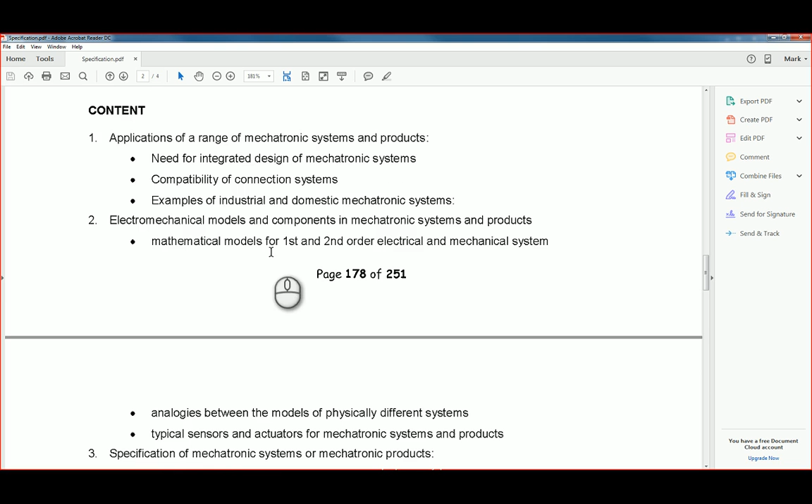The specification, you should have access to this already, you should be able to see. As you can see from the outcome content here, 1 and 2 is what's going to be covered in the exam, 3 and 4 down here is what was covered within the coursework. So we're looking to look at the application range of mechatronic systems and electromechanical models and components of mechatronic systems and products to do with first and second order systems, analogies, and sensor and actuator technologies within mechatronic systems.

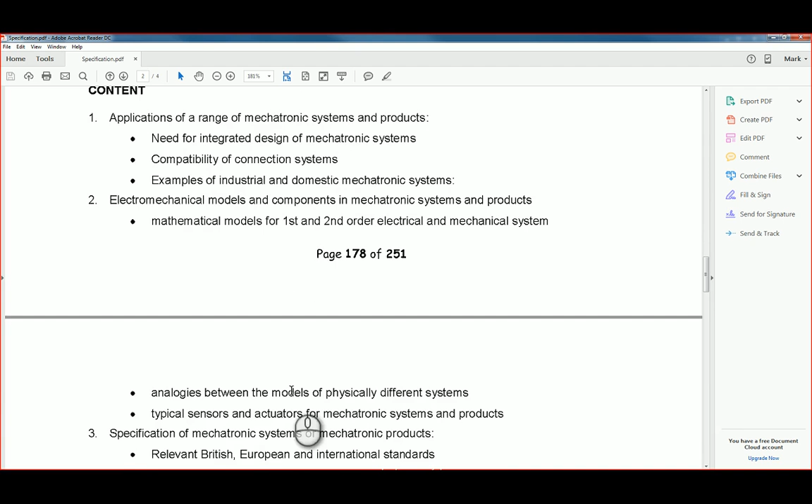In case you weren't aware, the exam is worth 50% of your overall grade. It's a 2-hour written exam. There's 10 questions in this particular one, covering the range of the outcome content of 1 to 2.

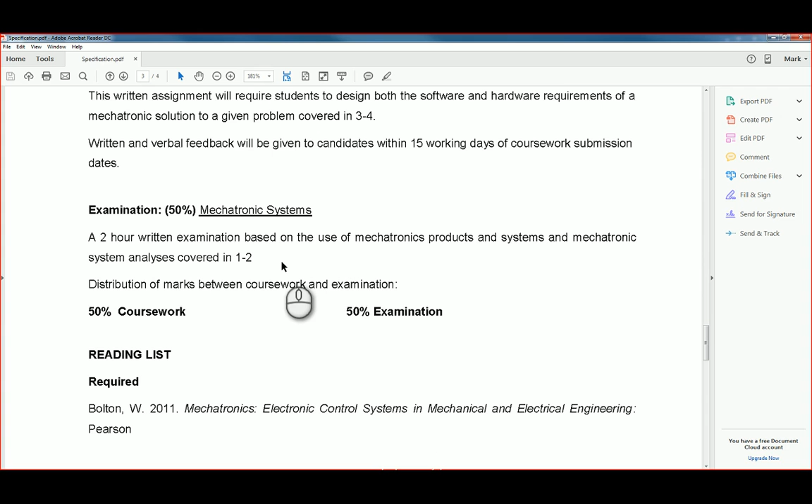So as I was saying earlier on in the class, your exam is mainly going to be based around the first 3 folders, and the rest was used for coursework. Within the folders, more information is really required for both coursework and exam. So don't be put off by the sheer amount, especially some extra PDFs which are chaptered out of certain textbooks, which I find useful for creating some of the notes and good for background reading if you have extra time on your hands.

So I did go over last time about reliability, unreliability, availability and unavailability. The notes were based out of the Reliability Prediction Basics PDF, along with one of the textbooks within mechatronics and also a textbook within measurement systems, and also a good PDF there is the probabilistic R&M parameters PDF.

But the one we're going to look at now for a few seconds is Reliability Prediction Basics. So make sure that when you're looking at this particular one that you're familiar with the main terms, what availability, unavailability is, reliability and unreliability, be able to define them, be able to quote the formula.

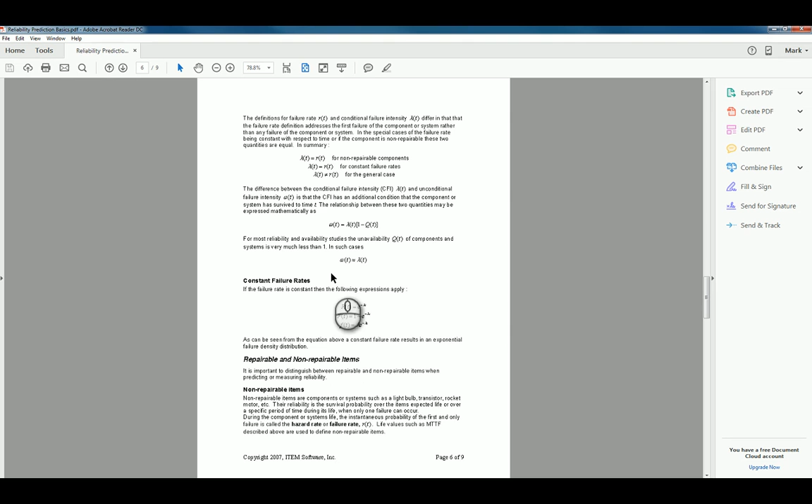There's also another one there, this is only 9 pages and quite concisely wraps up some of the formula, where they're derived from, how to rearrange in some instances which might be required. Talks about the bathtub curve, which we talked about last time as well. Also talks about redundancy, different methods of putting it in place, the reasons behind it, etc.

One of the main texts, however, will be, if I go back to this window, number 11, the reliability of measurement systems. So that is from the textbook I was speaking about a few seconds ago. It's a chapter out of it on reliability, choice and economics of measurement systems.

It runs through some of the main aspects again of how you derived some of the formulas, and again you're not going to need to know how the formulas came about. Some of the stuff in the actual text is a little over detailed for what we require within the exam and within the unit generally, but you do need to know where they came from, just for your own knowledge, so you know why they're being used, and the formulas themselves.

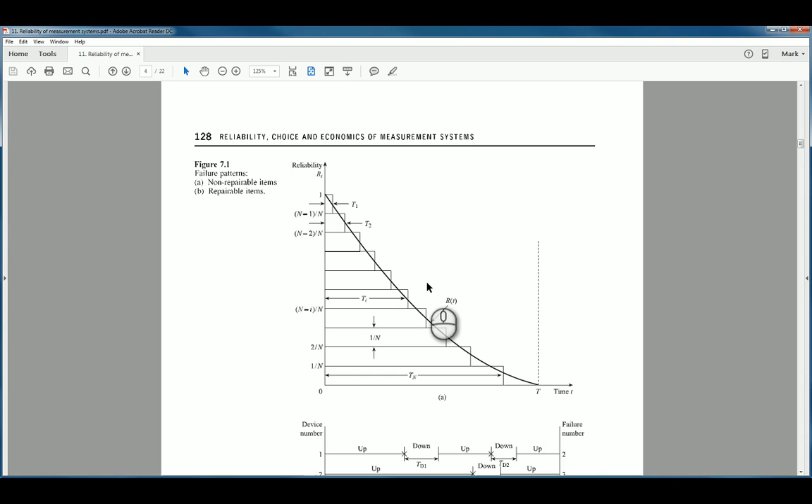I'm not necessarily saying you need to know each and every single one of the formulas on this particular one, but being able to show where they came from, just from an understanding point of view, to help you in some of the questions.

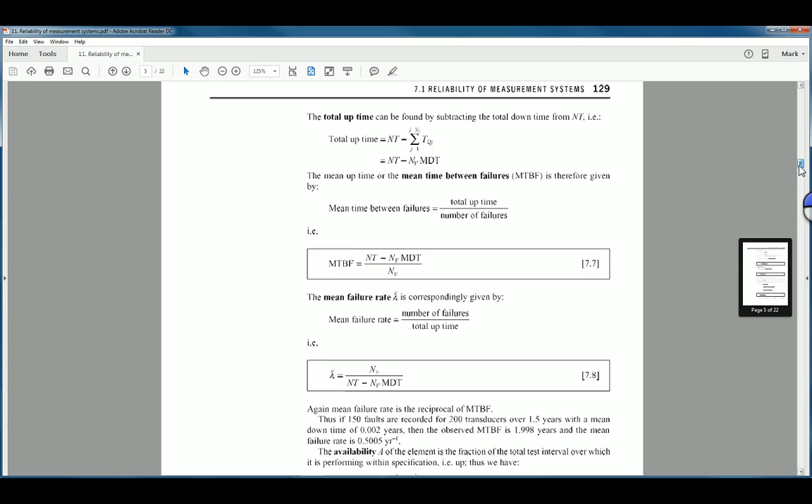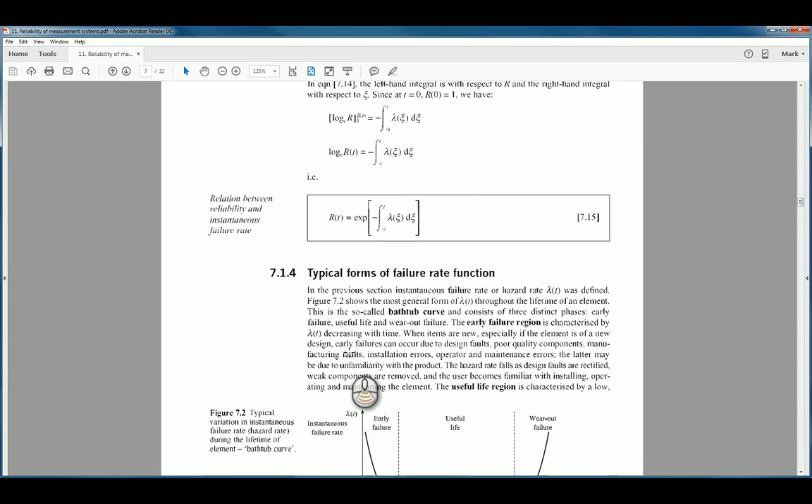So as you can see, as you scroll down through, you can get all the different types, failure rates, and so on. Just being able to understand each of them. Now there's some of them there that you see the derivation of has come from either integration or differentiation to derive an answer. You're not going to be asked within the exam to do that.

The maths within the exam is basic enough level maths. You need to obviously be able to understand the terms that you're working with and be able to be comfortable with rearranging some formulas and applying formulas to set values to derive other values to then get a final answer from a different calculation. But it's nothing that is a stretch beyond level 4 mathematics at all.

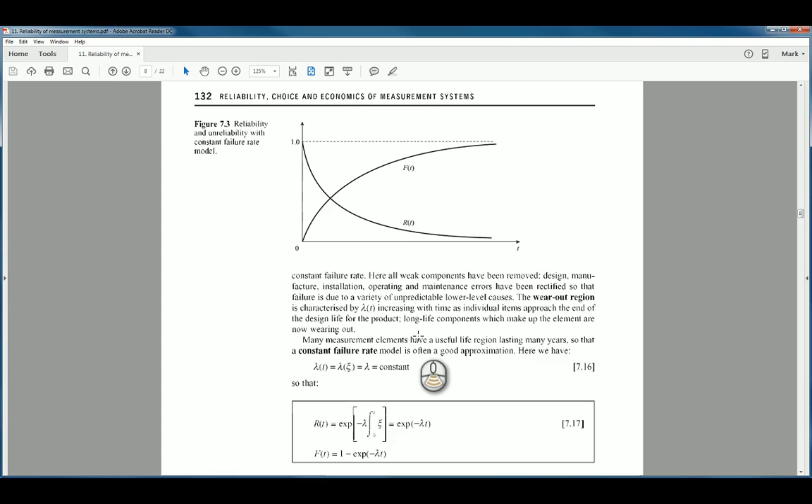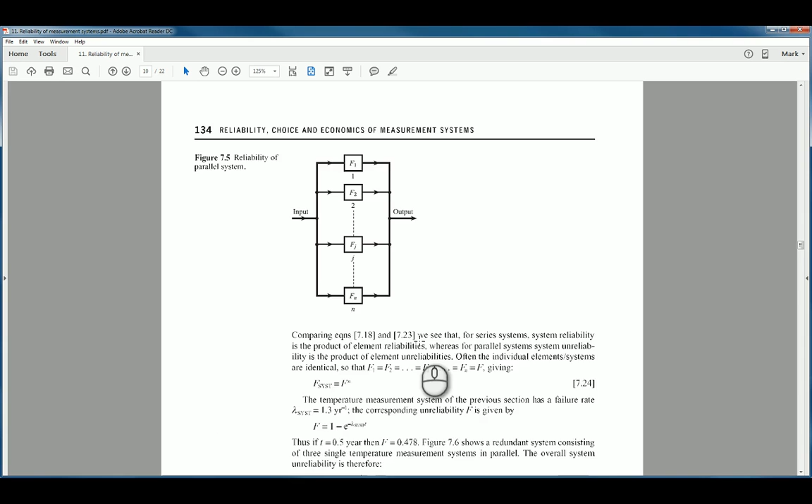Don't worry too much that some of the derivations of the formula within here seem overly complicated. The ones within the exam are nowhere near what you're seeing in here. All you're doing is applying the final formula that is provided within this document to a question to gain an answer.

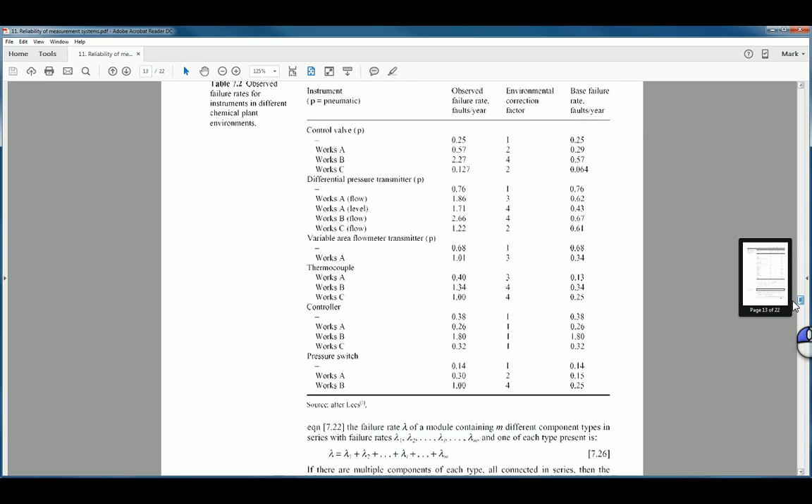This particular document is where a lot of the notes were made from, but it goes far well and beyond what we actually need. It is good for down near the end here that it does have design and maintenance for reliability. Being able to know why some of these terms are used and what they're basically used for within the measurement system would be useful for your exam.

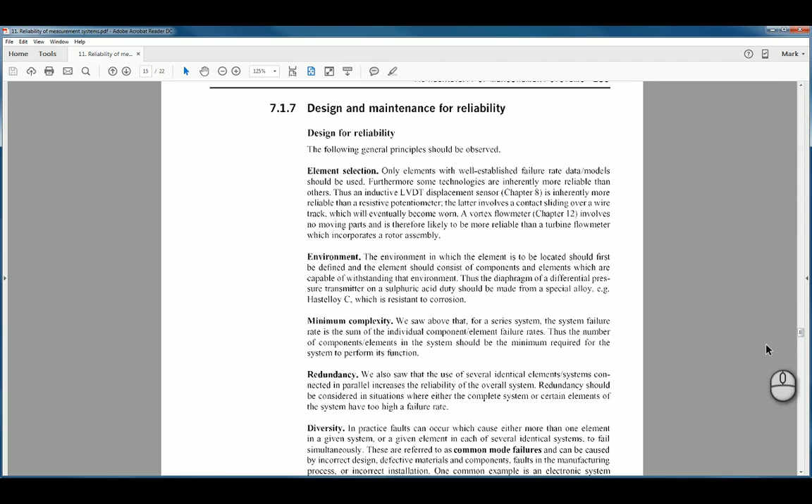The choice of measurement system isn't really applicable to us, so just skim anything else in this document. There's nothing really, honestly, within that particular one that is useful to us for the exam.

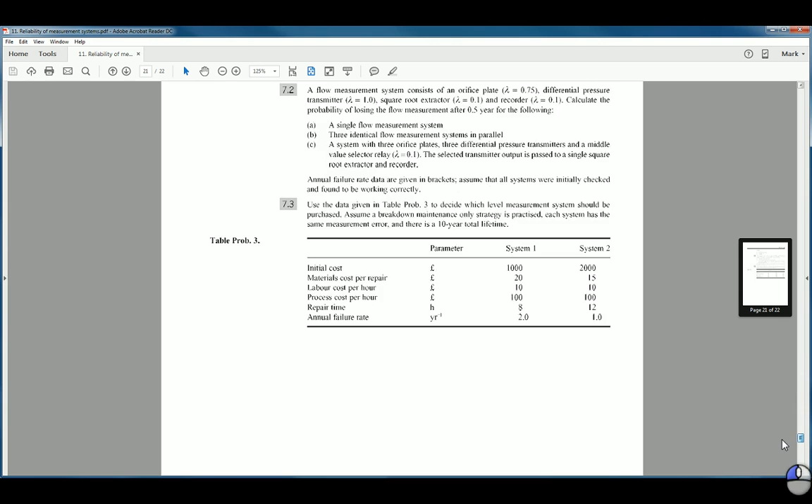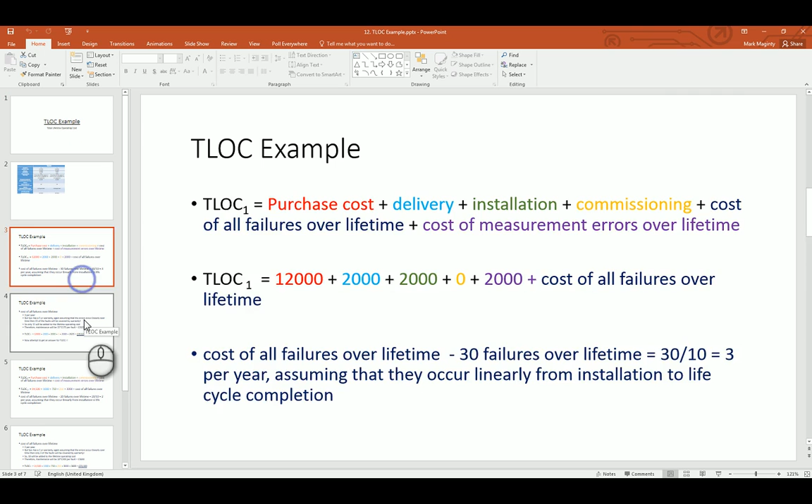Okay, back with the TLOC example. We covered it in a bit more detail, but I'm just stressing again, this is one of the things that is going to be coming up. As reference, I think it was Blair who spotted I had made a copy and paste error somewhere along the lines, where this value was 2000 previously. It should have been 3000 as it is now. I'm just going to fix the actual text color back into the purple.

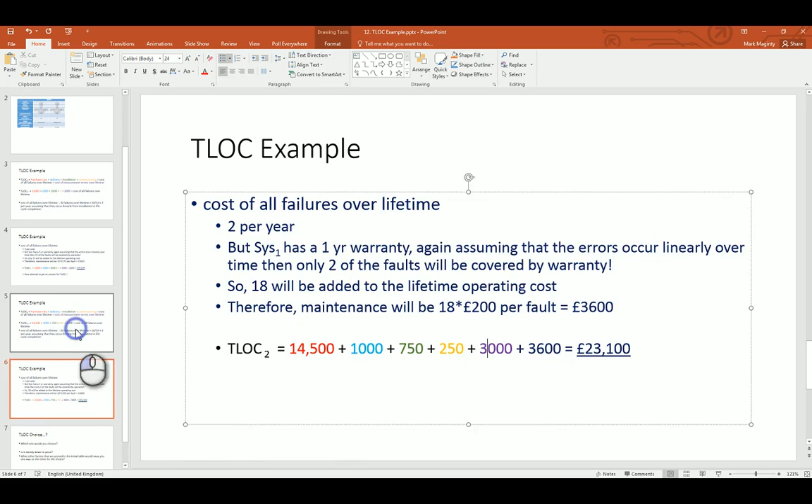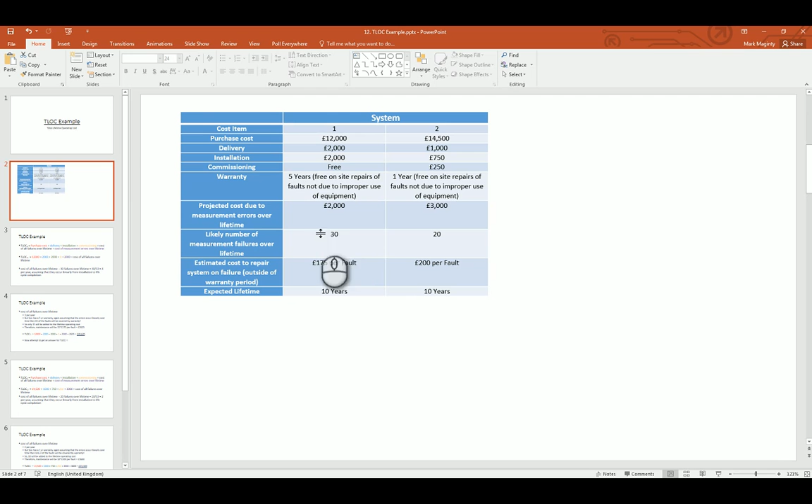So making sure that you're able to do TLOC examples and also that you know what the formula is. The example here only provides data that is actually required. It's not necessarily going to say that the data you're provided with is all needed for the formula, so don't get mixed up with what you're provided with and what the calculation requires. You may be provided with extra information that is not required within the formula, so you need to know what the formula is. If that doesn't give it away enough that you're going to be provided with the TLOC one, pay attention now. So TLOC, make sure you look over it, know the formula, know how to apply it.

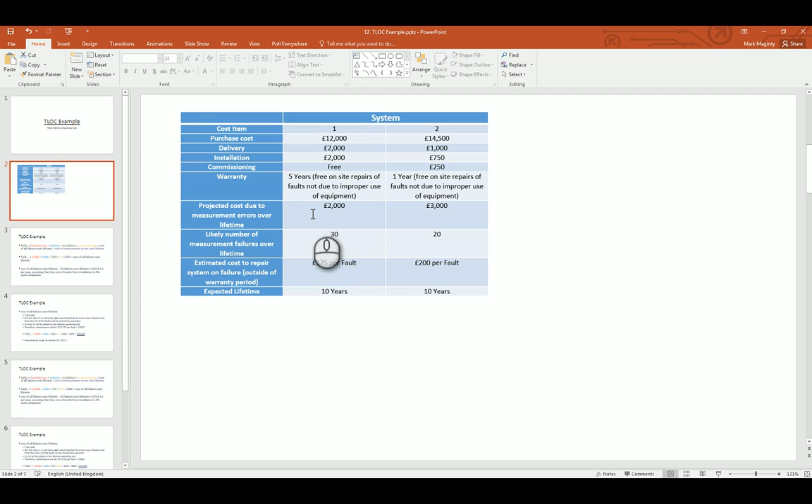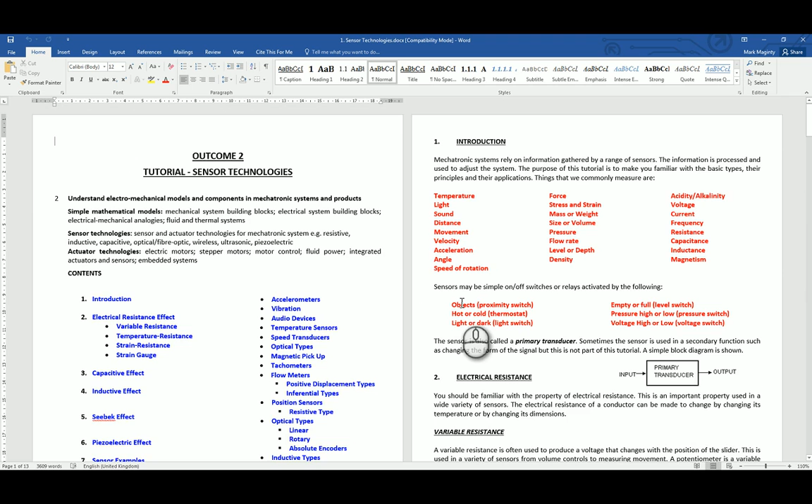Okay, so I've opened up number 1 from folder number 3, which is the Sensor Technologies document, the Word document. Again, don't be overly panicked because of the size of the document or the amount of information on it. You're mainly going to be looking to be able to apply base knowledge about sensors and actuators and be provided with enough information and formula to carry out simple calculations around certain situations. So don't be overly panicked.

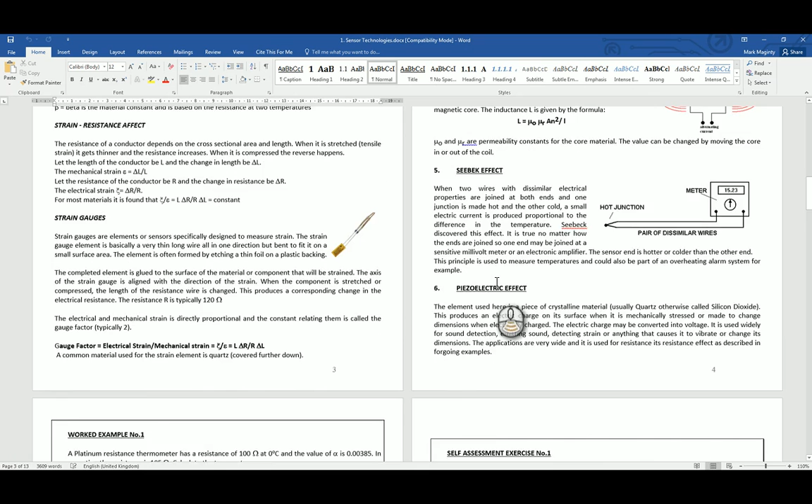You do not need to remember and revise the formulas within here. You're not going to be required to use those within the exam without them being provided for you. There are other typical examples. If you can look at some of them and why sensors, why actuators are used, that would be good background reading for the exam as well.

So again, have a quick browse over, make sure you're familiar with the operation of each of the types in case you need to actually describe the operation of them, either sensors or actuators, just roughly. We're not talking in-depth technical knowledge, but if you're asked, for instance, how an absolute encoder works, you should have an idea on how to put 5-6 sentences together on exactly how it works.

Next up is measurement systems. There's going to be a couple of questions based around measurement systems, and this here is number 4, measurement systems docx, off the same folder we were just previously talking about. It's a very brief overview of what measurement systems are, the anatomy of a measurement system, and these are some of the things, recall information, that you could be asked to provide within the exam.

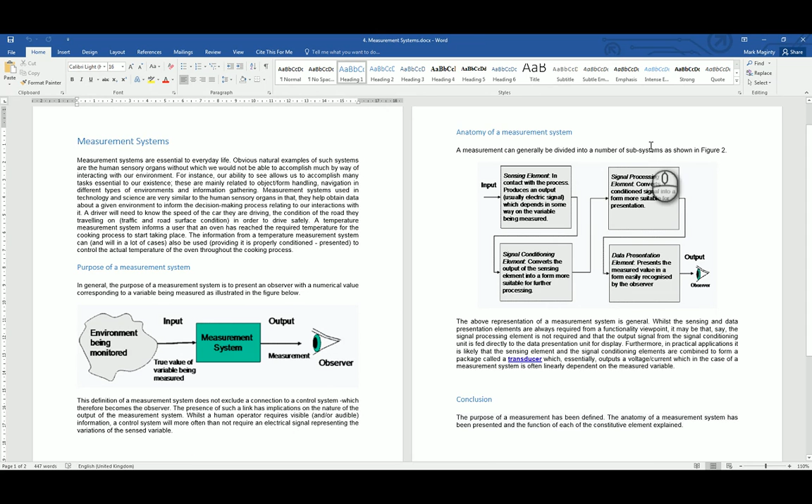So make sure you understand the systems, all the system elements of a measurement system, you know the purposes behind them, and you know various items that could be used in each of the elements. There's a separate one that I'll load up now, I believe it's near the end of this particular one. So this is number 3, measurement systems introduction, and again it covers some of the bits there that we're talking about.

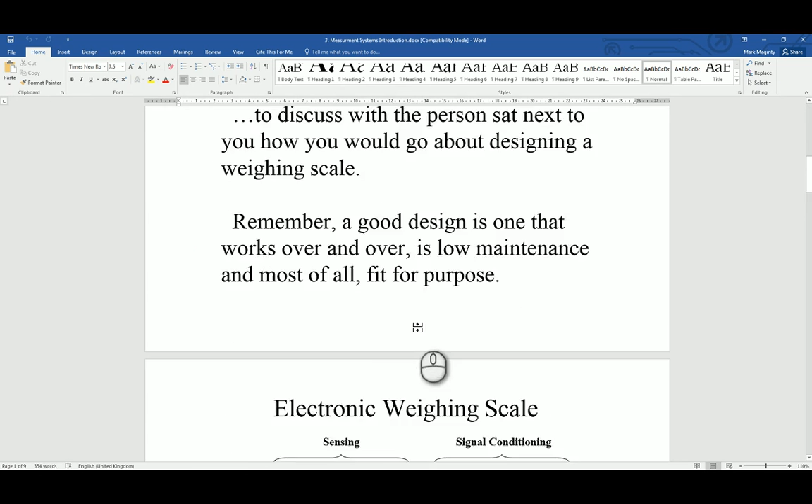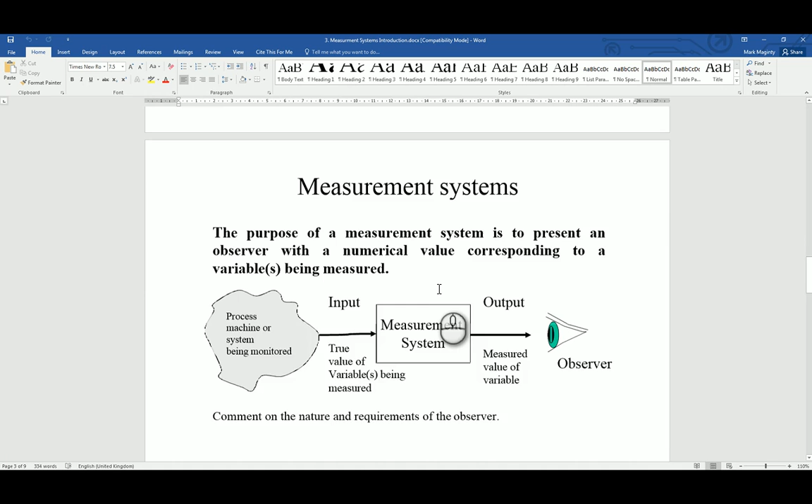There's an example on this particular one, an electronic weighing scale, showing you the 4 elements, possible components, and basically what each of the components does. There's then an overview of what a measurement system is, definition, block diagram representation, system anatomy, which is covered in the one we were just at.

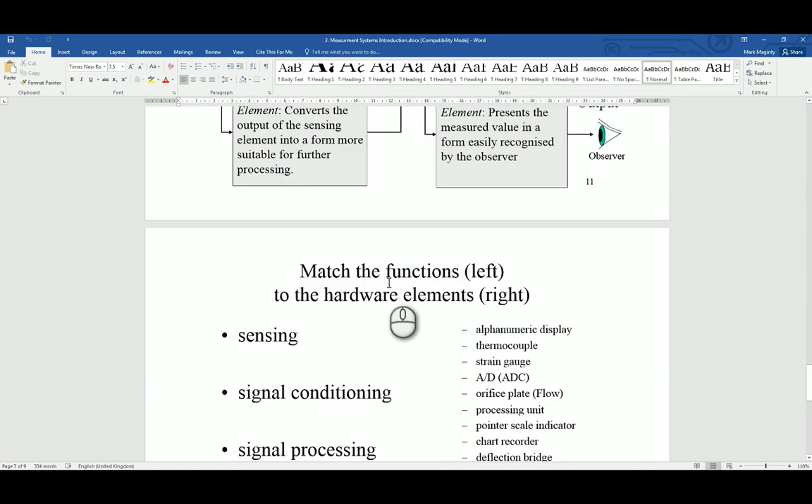And here there's the bit I was relating to, being able to identify types of actuators, or rather sensor parts, elements, and where they would fall either within sensing, signal conditioning, signal processing, or data presentation within a measurement system. So being able to recognize, where would the thermocouple come within each of the 4 elements, for instance.

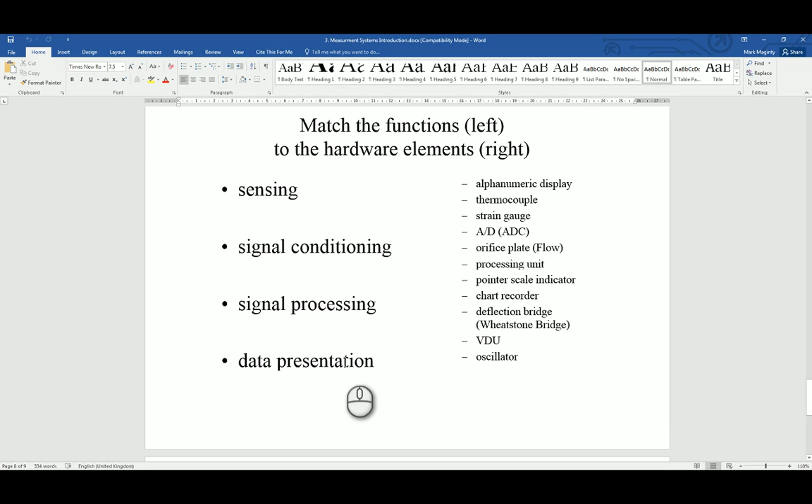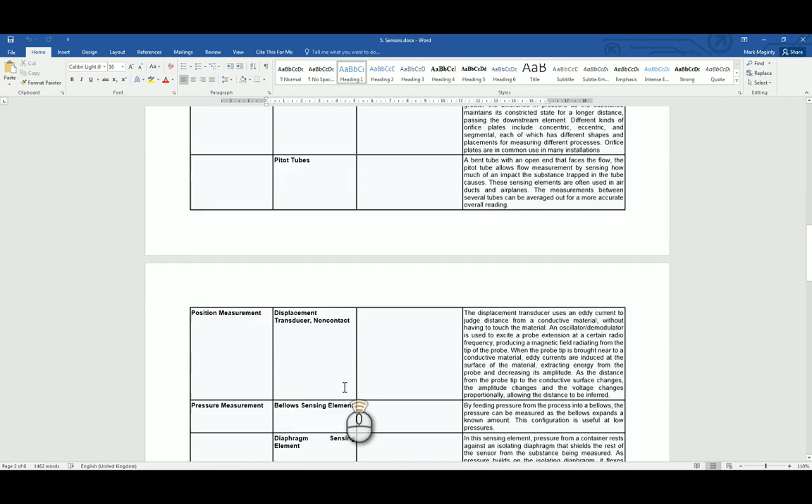There is also this document, number 5, sensors. It goes on to give numerous actual examples of different types of sensors, along with their characteristics and a brief overview. We're not asking you to rhyme every single one off, but you should be able to recognize that if you're given, for instance, a bellows sensing element, or pitot tubes, you'll be able to recognize that it is part of the sensing element rather than data presentation, for instance. So make sure you have a good overview of each of number 5, sensors, 6, 7, and 8, data processing, and so on, so you'll be able to recognize which part of the four-section element of a measurement system that each might fall into.

On to the next area of the exam, which covers a little bit to do with mathematical modelling. Within this there are two elements. There's a modelling tutorial, which is one of the main documents here. Let me get this loaded up.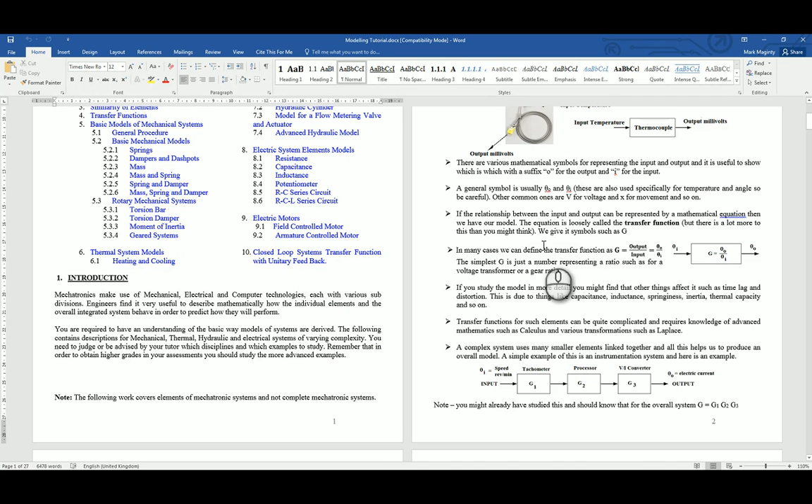Within this modelling tutorial document, you get a pretty good quick overview of basically all the terminology, how you derive some elements, and the process behind what's happened within electromechanical models. So read through, especially the first couple of pages, to see what the block elements are on about within each section and how they're represented. For instance, in many cases we define the transfer function as G.

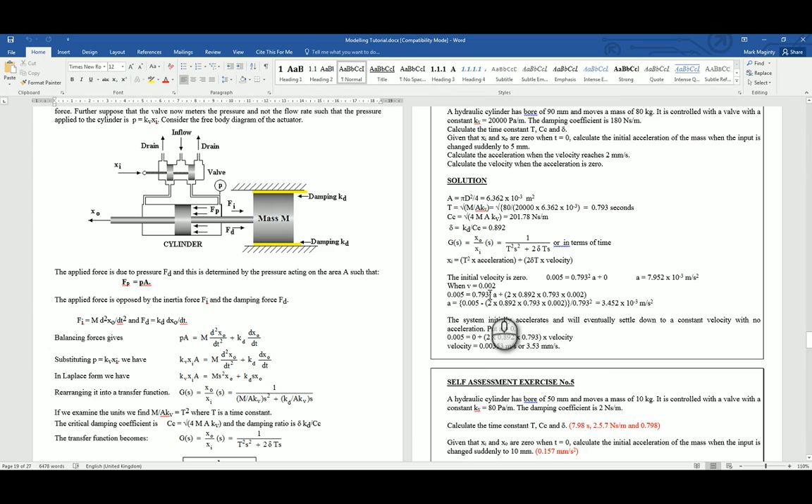Just making sure you understand the terminology and symbolism used within each one of them. And again, just to stress, don't let the amount of formula or notes in this section freak you out. You only need an appreciation of what the transfer function is and how it's used within each system. So don't worry too much about each of these - just have a quick read through, practice one or two of the questions so you're somewhat comfortable with each one and how they're applied to a given situation.

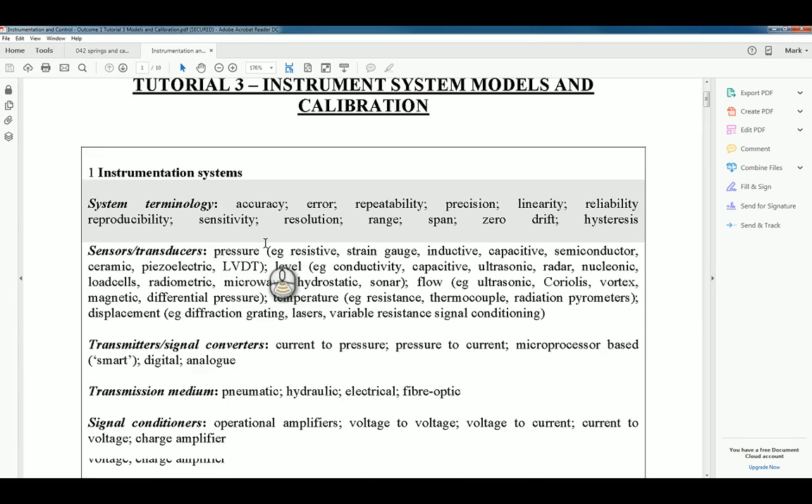Actually, if you hop back to folder 3, the measurement systems, the PDF I was looking for is Instrumentation and Control, ICON 1. This is a PDF from, I think, Free Study, based on the old HNC/D unit that we never actually delivered, but we did use some of the notes from it in previous years. Instrumentation and Control was the unit name, which lends itself well to a small section of what we do within mechatronics.

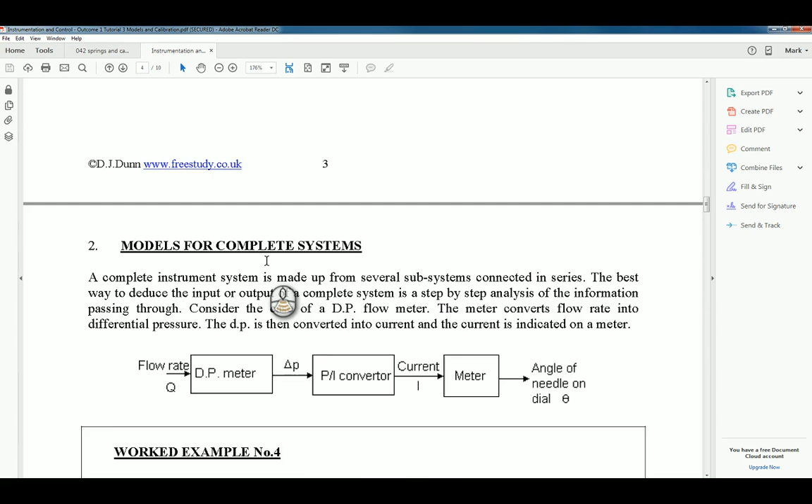But in here there are further examples of transfer functions and doing modelling, and one of your questions within the exam is based around one of the examples - I'm not saying it is the same, but it is based around it. So if you're able to complete all of the elements within this particular PDF, outcome one or whatever it is, you'll be well prepared.

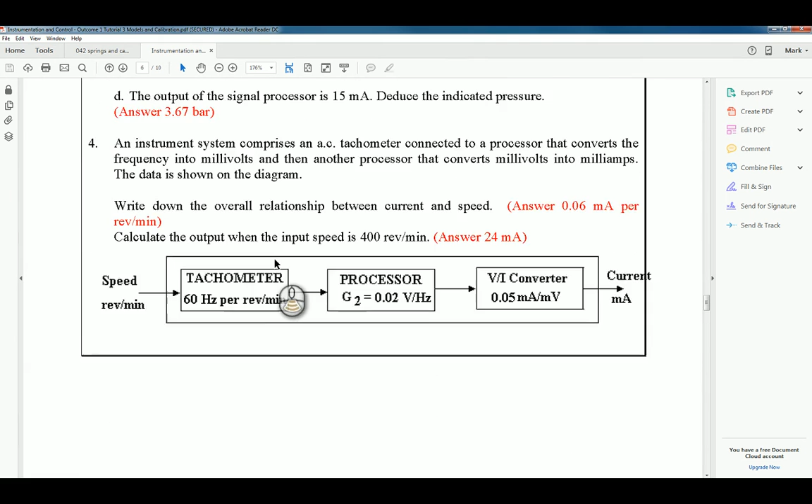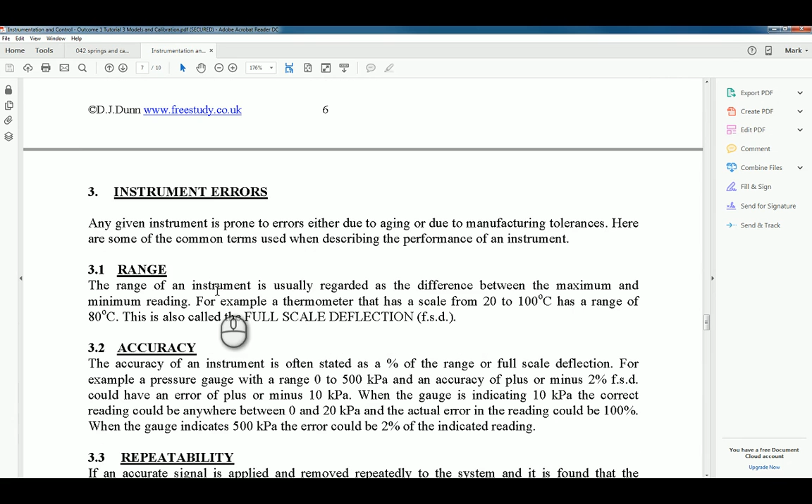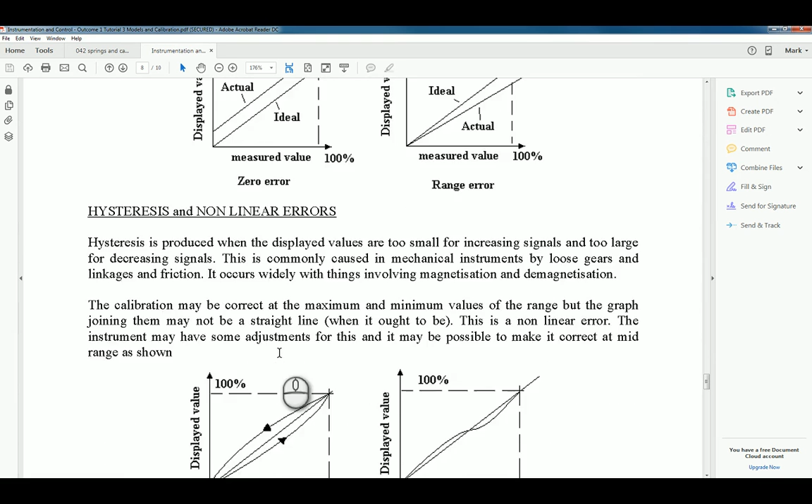Just down at the end of this document, there are also good definitions and explanations of some of the different things you're going to encounter within measurement systems, like range, accuracy, repeatability, that you might be required to rhyme off a short description of. Some of the ones down here are pretty good - being able to know the difference between range error and zero error, whether it's going to affect just the offset or the gradient, and the difference between the modifying input and the interfering input.

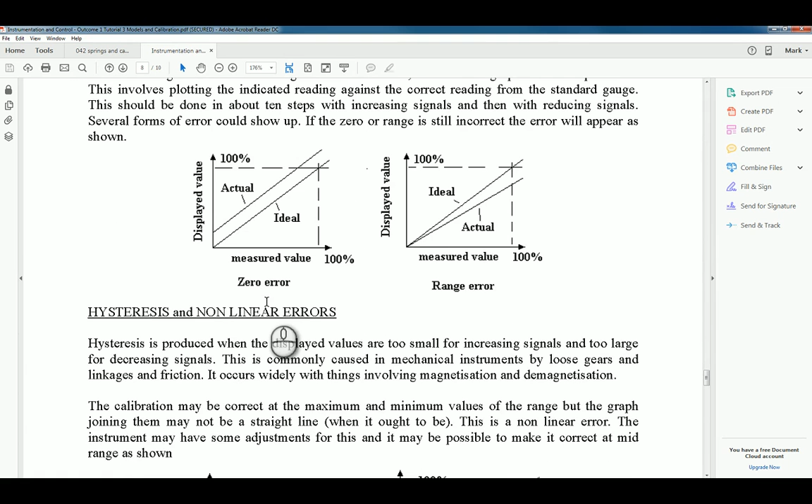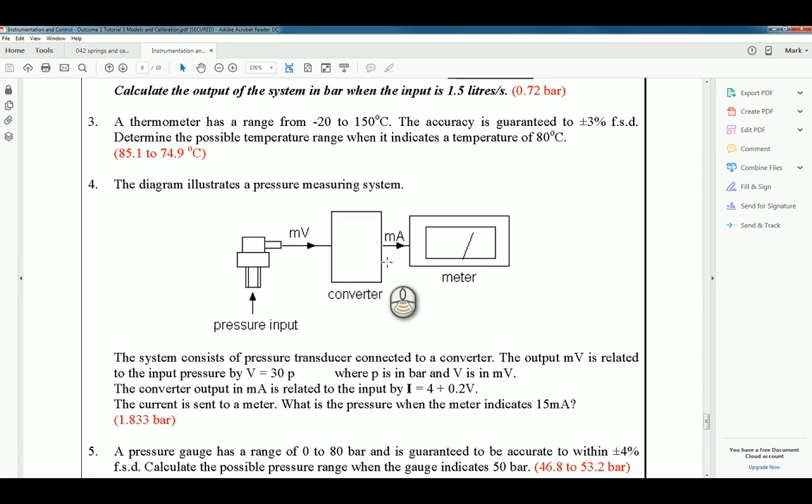Also down here you've got examples of hysteresis and non-linearity errors, or linearity errors - obviously non-linearity - with a couple of examples as well. As I say, all of these are pretty basic maths, and most of the stuff you will be supplied with in relation to this type of thing. If you're not supplied with it, then you're just figuring things out from what you already have.

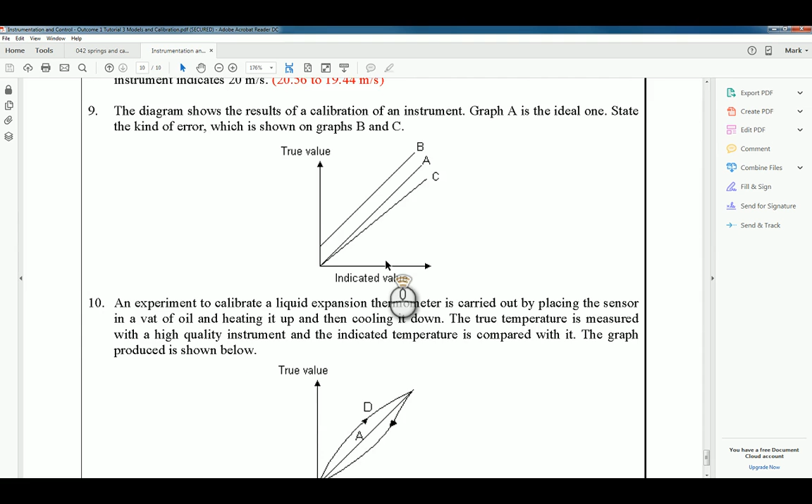So it's nothing beyond you in the maths sense of things - don't worry too much that way. If you're able to work through this document and be relatively happy with everything that's going on, have an attempt at being able to define each of those elements you're seeing on screen now, and you'll be well suited for that one question, or one or two, I forget how many, within that section.

Actually, the other point I wanted to draw your attention to is there's one final document, found under models, 042 springs and capacitors. I have it open over here already. It's a wee fact sheet that is only two pages long. Please make yourself aware of everything that is going on within it, read over it, and be able to quote formula from it - there aren't too many actually on it.

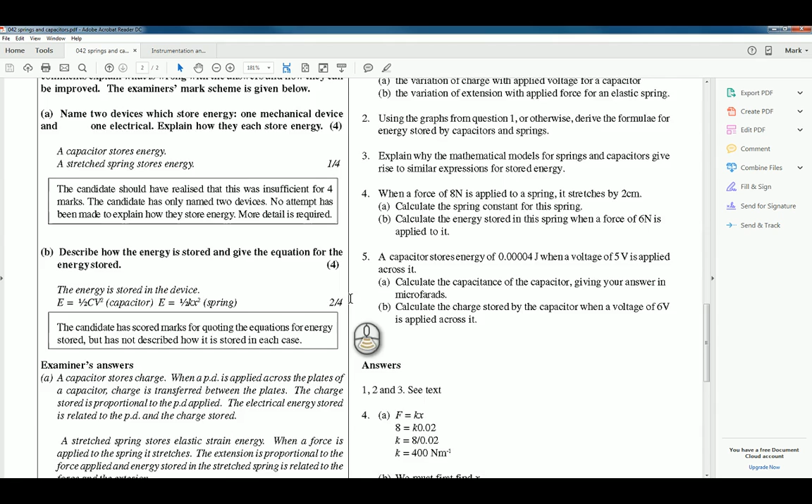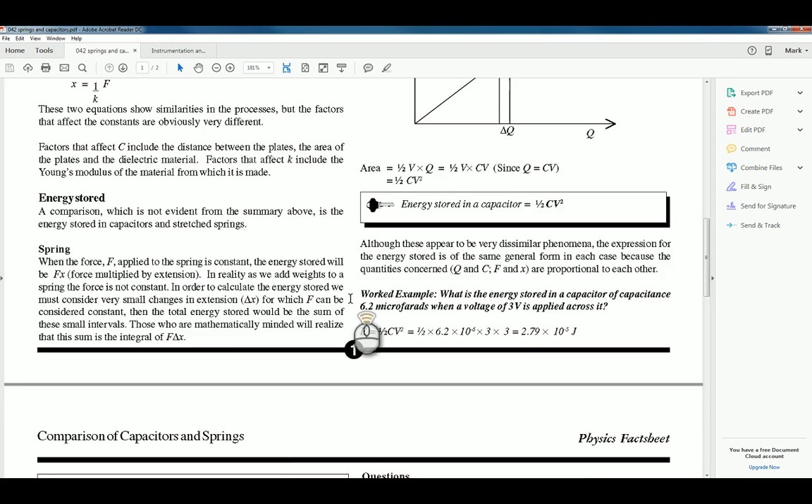There are also typical exam questions and answers on here, and if you can remember how lazy I can be in creating exam questions, you might be alright with what you're doing within this one sheet. So make sure you understand the analogy between the physically different elements, but which still have a lot of similarities in their maths - what we're talking about here is obviously springs and capacitors, and how similar they are math-wise, despite being physically completely different in what they do.

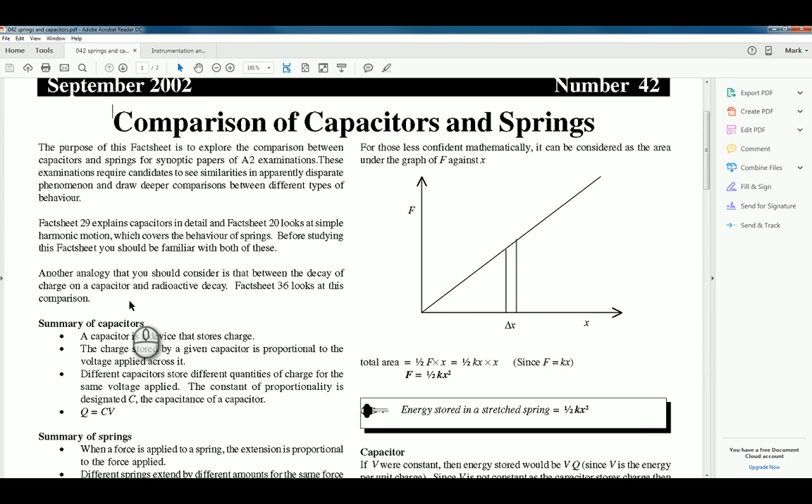So make yourself well familiar with each of those charts and everything as well, and typical exam questions and answers too.

And finally, to finish off the last little element, under folder 1, the intro to mechatronics systems: definitions of mechatronics, the various systems, and being able to have an appreciation of the benefits mechatronics provides when using systems together with one another.

So the integration of systems, why designing from scratch using mechatronics is more beneficial than using the standard sequential design method. You'll also be looking to describe advantages and disadvantages of designing systems from scratch that are mechatronic in nature, both for single products or products that are going to be linked together as integrated systems.

And also leading on from that, basically be able to define what mechatronics is in relation to manufacturing of both consumer and industrial products, and also mechatronics as a design philosophy.

So I think that's pretty much us finished covering all the elements. To say, be familiar in number 1 with what mechatronics is, being able to define it, the advantages that it provides. Within models, you're going to need to know this 2-page document.